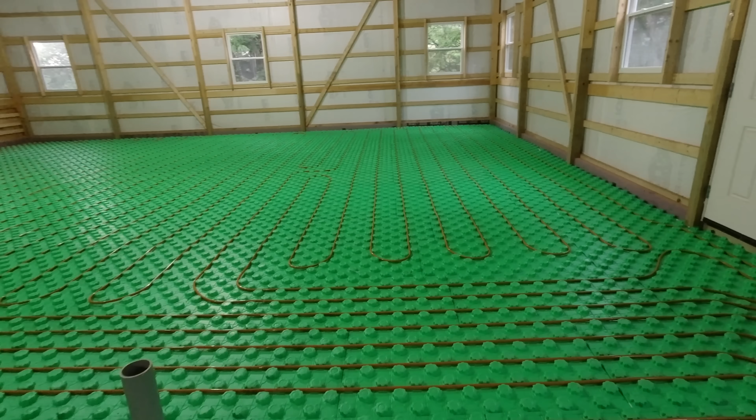So as I mentioned earlier, Melissa's Uncle Jay was over today, and between the two of us, we installed 1,500 feet of this tubing on this half of the building right here. And it went really, really well. Much better than what I thought it would.

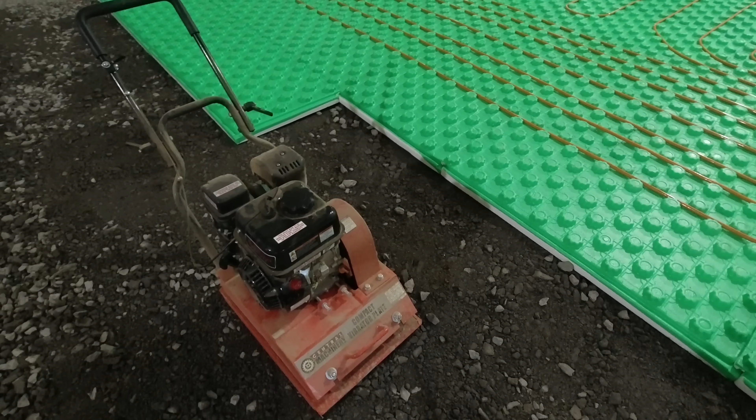The biggest challenge I've had so far is getting the panels down nice and flat. Maybe I was being a little over particular, but I was taking my time, and I started out with the wrong stone. I was using 2B limestone, and when you use the plate compactor on it, it just kind of rolls a little bit, and it's hard to get everything plus or minus a quarter of an inch. But what I did do then, I got some 2A limestone, and actually, it's not the best.

So here in Pennsylvania, we call this 2A limestone, and it's supposed to be 1.5 inches down to dust. But I know this is not PennDOT spec stone right here. Quarries can sell PennDOT spec or non-spec stone. This is supposed to be 1.5 inches down to dust. But as you can see in here, we have all these nice fines. I'll show you these fines right here. It's wet right now from the rain.

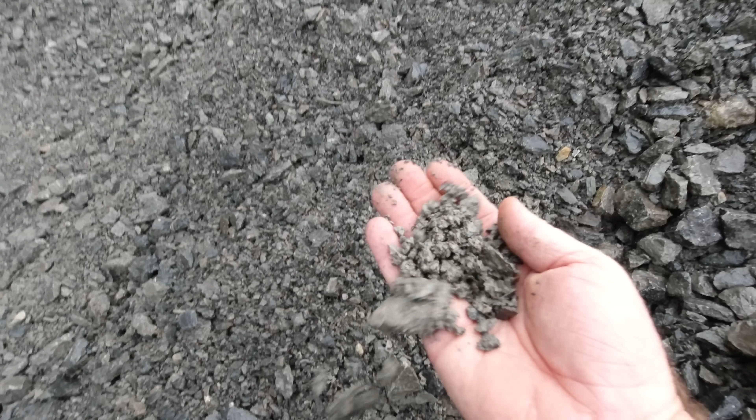It compacts really well. But mixed in here, I've got these chunks. These are much bigger than 1.5 inches. Look at the size of these. So these have been giving me a little bit of headache, but not too bad. There's more fines than there are this big stuff. But what I found is once I hit it with the plate compactor, maybe rake it a little bit, I keep raking these ahead and burying them or getting rid of them.

So if I were to do it again, I would make sure the stone I had was probably 3/4 inch and minus, and I think that would probably be the best. Sand would be pretty good as well. Not too many people put sand underneath the concrete around here, but I don't see why it would hurt. But yeah, doing it again, I would go with 3/4 inch and minus.

This is what I started with right here. This is what we call 2B limestone. It's about 1.5 inches clean. In other words, there's no fines in it. And what happens with this is when you run over it with the plate compactor, it just kind of moves out of the way, wiggles around a little bit, and rolls on you. So to get those panels down nice and flat, you don't want to use clean rock like this.

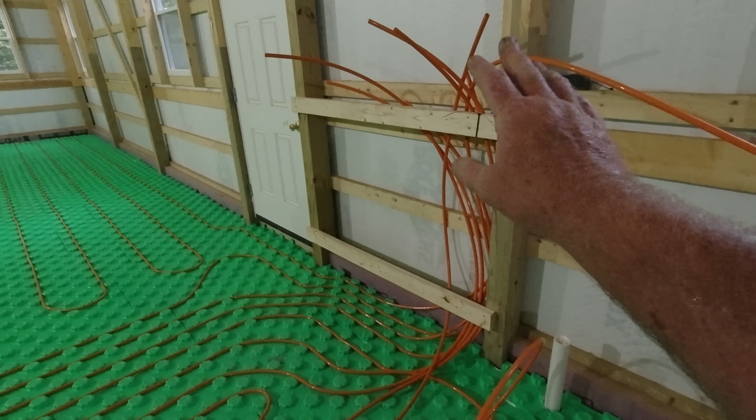All right, now over here, I've got quite the bird's nest going on right now, but we'll get that all cleaned up once we set the manifolds and hook up all the line to the manifolds. Before I do that though, I'm going to put some insulation on that wall. I'll probably put some 1.5 inch insulation in there, and then probably another sheet over top of everything. And then we'll mount those manifolds on both sides of the post.

On this side of the building, I have 5 zones. The rolls of tubing, they're 300 feet long, and I want to show you that in just a minute. But there's about 1,500 feet, like I said, just on this side of the building right here. Total time to put this in once the panels were down was probably, I don't know, 2 hours, maybe not even that. But it goes pretty well.

This stuff doesn't kink. I mean, I'm sure if you tried, you could get it to kink. It's nice stuff, though. It works really well. When you're rolling it out, it's definitely a 2-man job just to keep it nice and straight for the guy that's stomping it down between these little nubs on these panels.

And let me show you something here. Now this morning when we were installing this, I didn't really have any time to run any cameras. We were pretty busy, but I want to show you how easy this goes in. Like I said, you've got one guy rolling it out, and the other one, you just kind of push it down in those nubs right there. And I'm telling you, it's tight.

I'm going to pull this out. We did not have one section out of 1,500 feet that popped back up. It's very secure. But if you do screw something up, it's no big deal. You can just pop it out, move it over a row. But we kept all our rows about 1 foot apart all the way across here. Now we're a little closer. Some places we're 6 inches here because this is where the return is to the manifold.

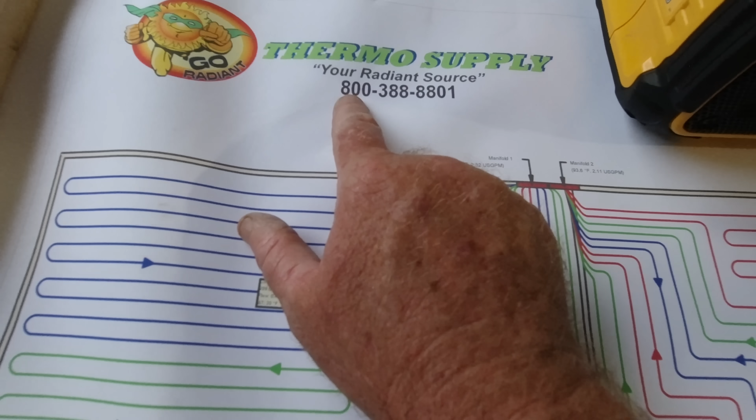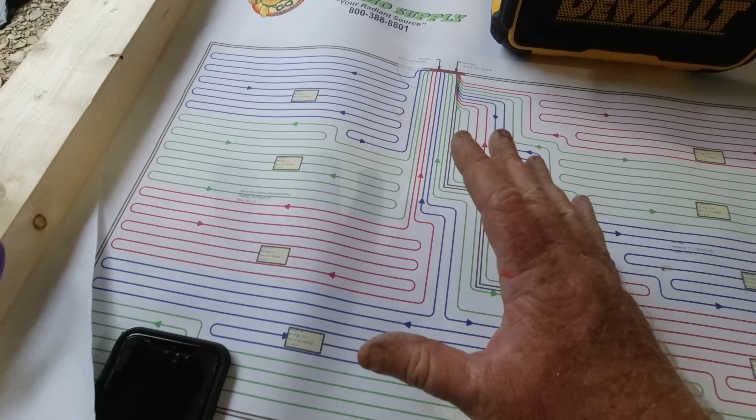Included in the purchase of all the materials for the rough-in was this drawing right here. This was my first zone right here. We came out of the manifold. That's what I just showed you there a minute ago, zigzag back and forth. And it's all calculated to be 300 feet. Now, we stayed pretty close to this. Not exactly. Had a little bit of fun with it. But everything we have out there is probably within a foot. So I think it'll work really, really well.

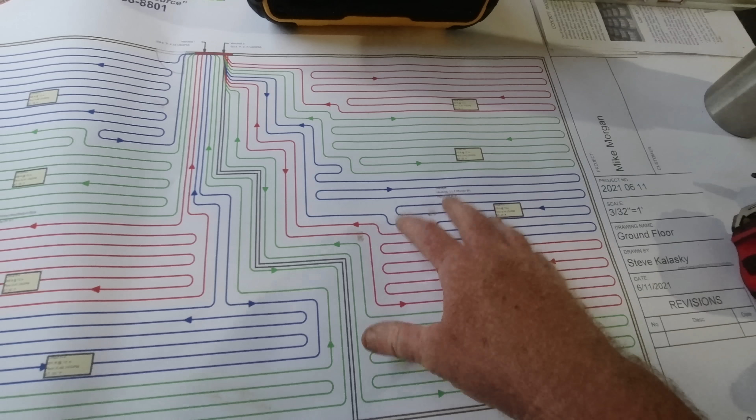As a matter of fact, over in the actual garage area, we're going to be doing that tomorrow, I may end up with just 4 zones in the garage instead of 5. Because I found that I have a little bit of extra each time I come back to the manifold. And one of the reasons is I'm staying away from the walls a little bit more than what it showed on here. Like this whole area over in there is going to be a big game room.

Now this is a big building. This is kind of a big undertaking right here. Just inside here is 2,880 square feet. But the reason that I stayed away from the walls a little bit is when we frame this in, I need to frame in between these posts. That way I can use both adhesive and probably Tapcons in the concrete. But I kept all that tubing in on this side, that side, that side. And I'm also taking pictures of everything so I know where everything's at, with some tape measure, measuring things.

And then I'll keep that in a file. So the interior walls in here, what I'm going to have to do is probably just use adhesive. Now I am doing 5 inches of concrete, and as you can see, this kind of sets down in a little bit. I mean, you could probably get away with some short Tapcons, but I would hate to go to all this work and screw it up by putting a nail or something into it.

Just framing a wall. I have more panels to put in tonight, but we're well over halfway, and it's going to go a lot faster now because we kind of cut around all the plumbing. This stuff cuts pretty easy, but everything you have to go around just adds a little bit more time to it. Even you can see the way you have to notch it around the posts where the doors are. They're double posts right there. All that takes some time.

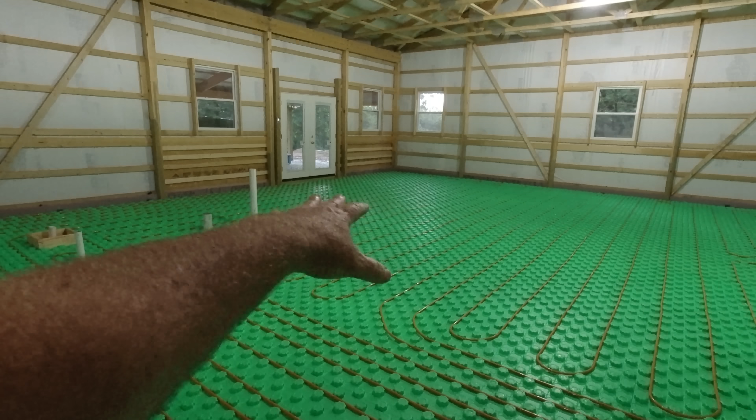That box is set right at finished grade of concrete. Over here we have a drain for a sink right here, just like a wash tub. The way this is going to shake out, I'm not going to get into all this right now, but like I said, you have a big game room over here, kitchen, bathroom, little office right there. But the game room is going to be 24 feet wide this way. But as you come over here, it's going to extend another, I can't even remember, 8, 10, 12 feet. It's going to be a big game room, all finished.

It'll be really nice. This is that conduit that I put in before, just for future use. If we get public water or something, it goes out underneath the driveway, out to the lawn. So if we do get public water or something at some point, I won't have to dig everything up across that driveway on that side of the building. Right here is the water line that comes from the cistern tank, which is out there, 4,000 gallon tank.

Now, like I mentioned earlier, if there's guys out there that install these Crete heat panels all the time, they're probably not going to get much out of this video because they know a lot more than I do. The purpose of this video is for people out there that want to save some money if they're building a new building like this or a new house. This is something that I feel most people could do on their own. You know, you need some support from your supplier like Thermo Supply. They were very, very helpful. But like I said, it's very labor intensive, tedious work, takes some time.

I probably have, I'm just trying to think, I don't know, 25 hours so far in what you see behind me. And if I did it again, I could probably cut 1/3 of the time off of that, just because now I know a little bit what I'm doing. I imagine a whole crew that does this kind of stuff could probably put this all in a day, but I don't know. But it's definitely something I think most people could do on their own to save some money.

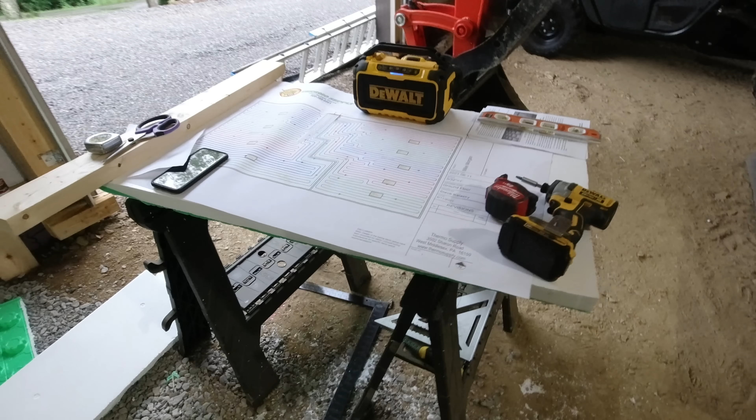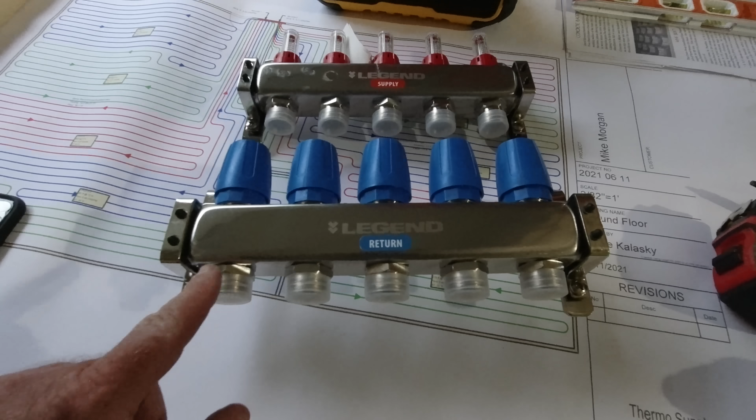I think just 2 more things I want to show you today. But this is one of the manifolds. I have 2 of those. 5 zones, 1, 2, 3, 4, 5. This is the supply line. This is the return. This will mount on the wall. One on that side of the post, the other on this side of the post. That'll give me 10 zones.

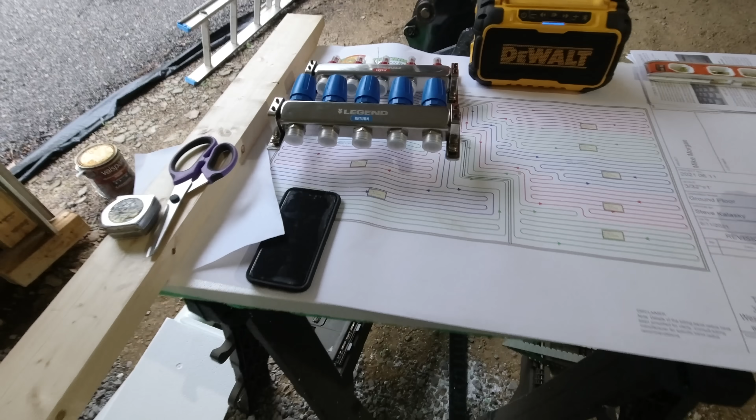And also with this manifold, as you can see, this will move a little bit. So depending on your approach of your lines coming into it, this gives you a little bit of wiggle room right here. Legend, it's called.

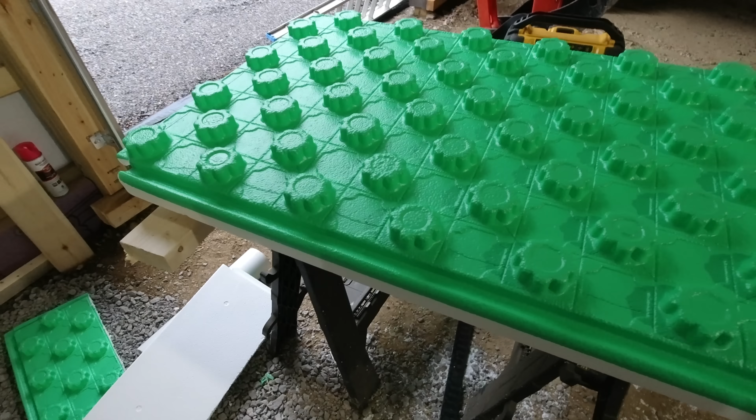Now I just have one more thing to show you. I kind of briefly showed these panels the other day in a video, but I'll give you a closer look. As you can see, they're kind of like tongue and groove. Got these nubs on here. They're 2 feet by 4 feet. I have, to do this whole building, 363 panels, I think. I think that's what I bought.

And the whole package so far for the rough-in was about $7,500 for all the panels, the manifold. Also have a pressure test kit. Everything you need for the rough-in was about $7,500 for a 2,880 square foot building.

Now, like I keep saying, I do think that a project like this is something that an average guy with some basic skills could do with a little bit of help and some support from your supplier. Now, if I was putting in a forced air furnace and a bunch of duct work, that is something that I wouldn't try to tackle myself. So I think you could definitely see a cost savings if you did this type of work yourself.

And with the Crete heat panels, it is wicked fast once you get to that point. Leveling them up was a little bit of a challenge. Part of that was my fault. But if you take your time doing that, the rest of it seems to go pretty well.

Matter of fact, Melissa's Uncle Jay, who was here this morning, he has radiant floor heat in his shop.

I got to take you guys down there sometime. He has a beautiful place. He's got a pond, real nice shop. He's an excellent woodworker. He used to build houses. Really has a beautiful place. He's actually working on a waterfall right now, but sometime I'll take a camera down there and show you that. But anyway, I'm getting off track.

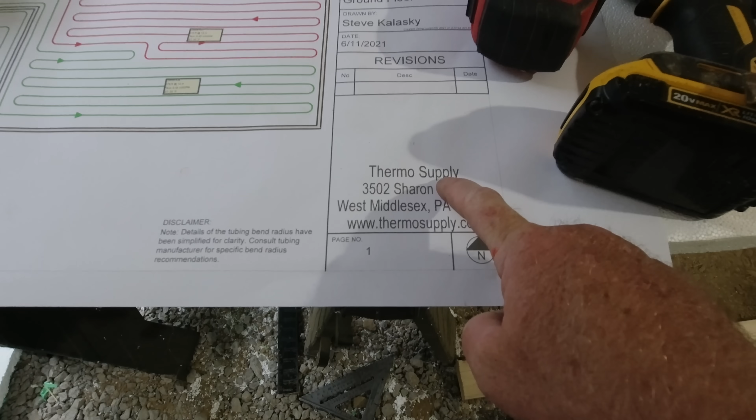Oh man, I forgot one thing I wanted to tell you. Not only did I get this from Thermo Supply in Pennsylvania, we're in Pennsylvania, the tubing came from Oil Creek Plastics. They call this Heat Flex. It's 1/2 inch by 300 feet, and they call it PERT, I believe, PE-RT. Oil Creek Plastics, I just looked it up. They are in Titusville, PA.

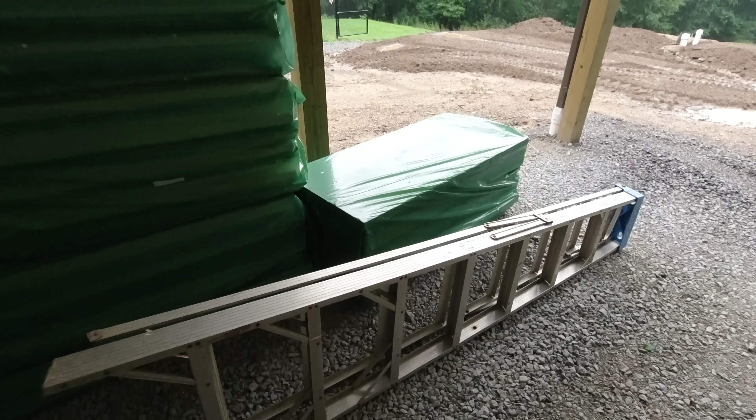So Titusville, PA is known as the birthplace of the American oil industry, by the way. And all the tractors, excavators, trucks, everything around here, we appreciate that. And the Crete heat panels, they are made in Wisconsin. And Wisconsin is known as the birthplace of Wolf Ridge log splitters.

There's grandson Ty's shovel. Leave stuff laying everywhere.

But basically, we have an all-American heating system here in the new building.